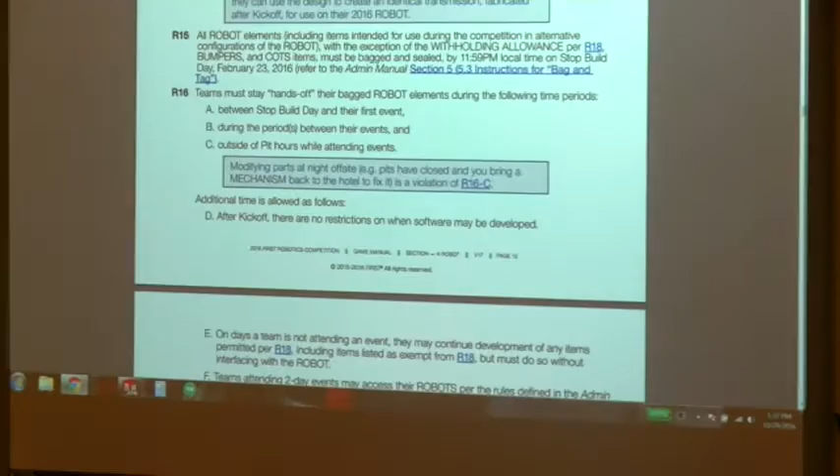So we got real lucky. We were real fortunate, everything fell in place for us at the right time. And to be honest with you, the robot wasn't even nearly as complete after the 6 weeks as you see it there. It wasn't even close.

We had several different regionals that we went to, and at every regional we were able to work on the robot and make it better and better. At Palmetto, our goal, we sat down as a team and said, okay, in 6 weeks what is it that we can do? And then how many regionals are we going to? We ended up going to 3. And then what do we do at each regional to get ready for the finals at the nationals?

We knew that in order to compete in the first regional, we just needed to drive. We needed to figure out how to make that thing drive. So we went to Palmetto and we took 3rd place. We were working on the shooter, didn't quite have it figured out yet, but we were driving over the obstacles and we were able to compete, and we did okay.

We took 3rd. Went to the Buckeye, that was the next regional, and our goal was to get the shooter to work. So we finally got the shooter to work, so we were driving and the shooter was working. Then the next regional after that was Cincinnati, and our goal there was to climb. So we went from driving to shooting to climbing.

We got the climber to work in the pit, and we finally had a chance in one of our last matches to try to climb, and it didn't work. We almost had it. So then we're thinking, okay, by the time we go to the Nationals, which is in a few weeks, we better have that climber working.

So we got to the Nationals, and we were told our robot's illegal. The wheels went past the frame, so we had to extend our bumpers and our frame by 1 inch. So we spent all our time working on our robot, extending the bumpers, extending the frame, so that we would cover those wheels, instead of working on our hanging, climbing mechanism.

It used to be 20 pounds, now it's 30 pounds, and who knows what it will be next year. But these are the most important rules, and I highly stress and emphasize the importance of reading the rules from cover to cover. You're going to see a lot of stuff that's repetitious from previous years, because think about it - these guys putting on a tournament, they've got this huge manual, they're going to change a few pages, a few things. And sometimes they hide important rules in the appendix. So you've got to read it from cover to cover, you've got to read everything.

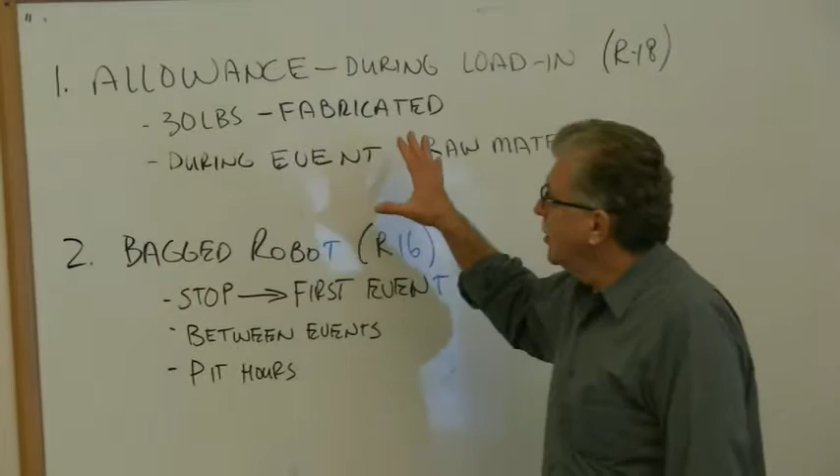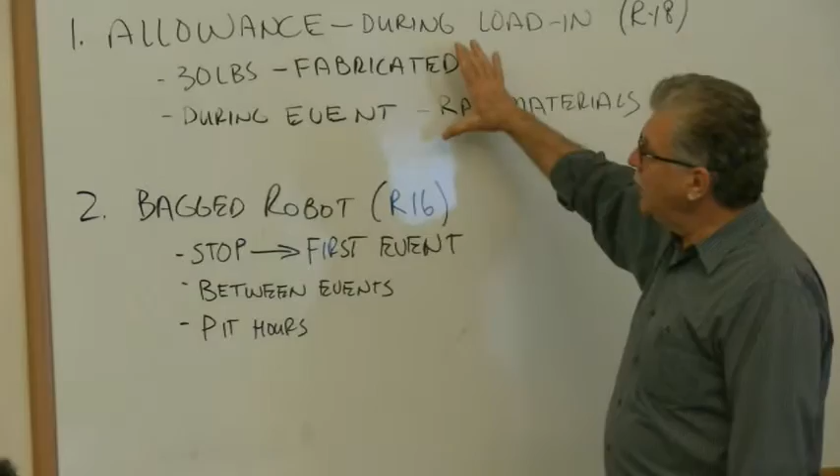And when we read the rules, this is what we based our extended build season on. Number one, you had an allowance during the load-in, rule number 18. You can bring up to 30 pounds of fabricated material. During the event, you can use all the raw material you want. So what that told us is that after the 6-week build period, we bag up the robot, but we can work on 30 pounds of something. So what is it that we're going to work on? You have to actually schedule it.

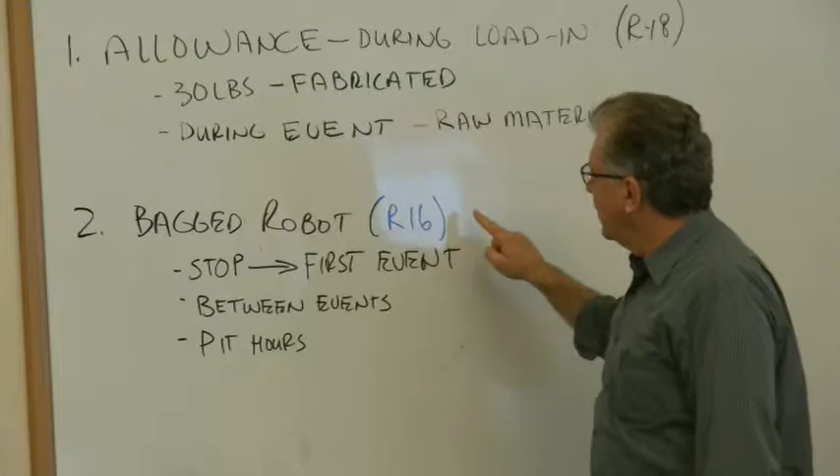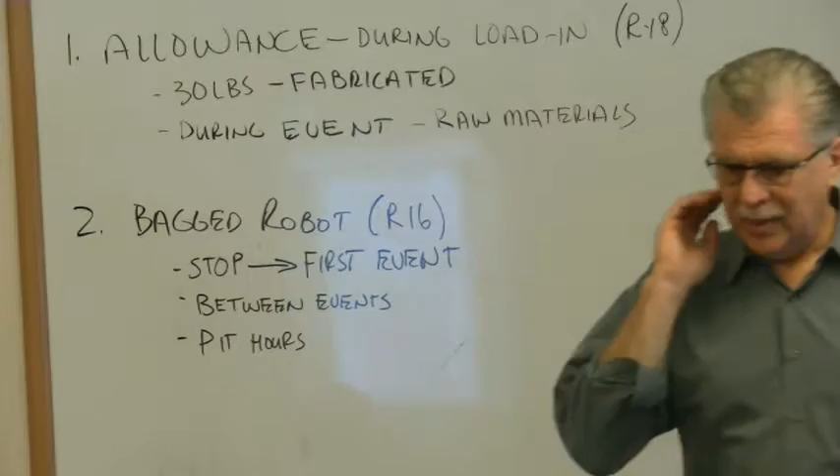The other part is that the robot has to be bagged, rule number R16. You have to stop working on the robot up until the first event. You cannot work on it between events. And you can only work on it during pit hours, not after pit hours. So you can take all that raw material. If you have an object that you want to build, you have to design it so you can build it with your tools in the pit, whatever you have in your pit. And you can build whatever you want. You can build a whole new robot if you wanted to, if you have enough raw material. Or you can bring in 30 pounds of replacement parts that you can put on that robot.

And this is what we took advantage of. So Robert's going to show you the actual setup - any questions before I go further? Because this is a real important rule, because this is what extended our build season. Because at every regional, we brought something in. Yes? Would you bring something different in every regional, or would it be the same 30 pounds there? You can bring something different in every regional.

Here's something else, and this is something we were kind of discussing. If you have your robot that weighs 120 pounds, they don't weigh it when it leaves, and they don't weigh it when you first bring it in. So could you have a whole bunch of stuff in that bag, like maybe another arm you're working on or something wrapped up? You have to stop working on it, and you can't get to it again until the next regional, and you can bring another 30-pound additional into the competition.

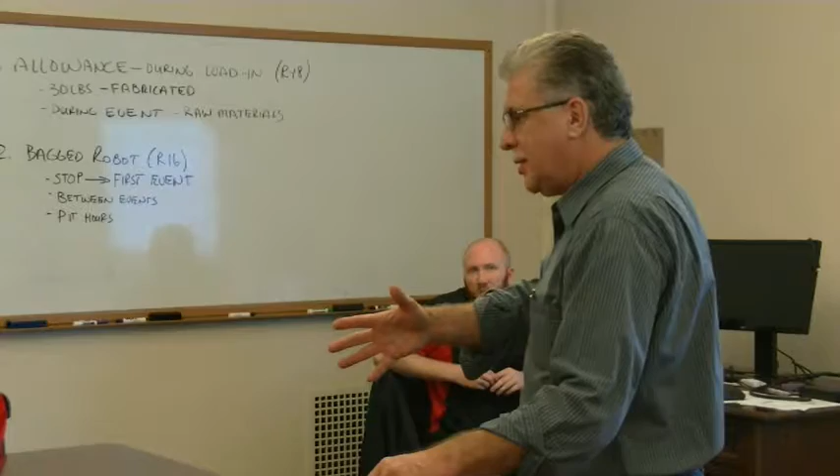Yeah, exactly. Now you're extending your whole build season, aren't you? And according to the rules, that's legal.

And people do that. If you looked at the Buckeye Regional, you remember that one team, I think they were called the Sparks? They didn't compete in any of the matches at the beginning. They weren't on the practice field. I think they missed the first 2 matches they were in, and they finally started coming out, and they ended up winning the competition. Why? They were working on the robot the whole time. They were actually building the robot. It just came in pieces and parts in the bag. And they had some 30 pounds worth of other equipment that they were assembling - that whole robot in the pit. That was their first regional. So they really extended their build season, right?

So they didn't even have a completed robot when they bagged it. And they finally completed it after their first regional. We saw them at the Nationals. And they finally had their robot working.

So if you think about what it is that we did this past year, we're not going to be able to duplicate it this year. We're not going to go to as many regionals. But at every regional we went to, technically, we can bring in 30 additional pounds of material to put on that robot that's fabricated, to either be a replacement piece. So as we're competing, we see there's something wrong that doesn't work, let's fix it.

So you can fix it during the pit hours. You can strip everything out. And at the Buckeye, we stripped a lot of our stuff off that robot. But it was when we weighed it before we left, so it was less than 30 pounds, so we knew what we could bring back.

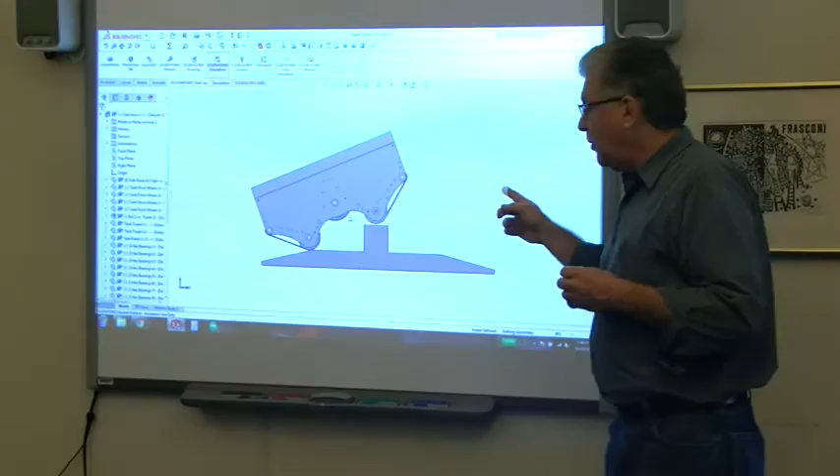So if you look at the design, Robert's going to go through the stages of designing. The first thing we designed was how do you drive over the obstacles. And before I get him started on this, here's the reason why we picked this design.

If you remember, our robot had two series of tracks. We wanted to do pneumatic wheels, but nobody had pneumatic wheels left, we couldn't buy them anymore. Do you remember that? We were calling everywhere. The ones we found weighed so much, and we'd have to modify them so much, we said man, we're messed up, everybody bought the pneumatic wheels. AndyMark didn't have them, McMaster-Carr, we couldn't find the right wheels. We called everywhere to get these pneumatic wheels, we couldn't get them. The 4-inch, that was the 4-inch pneumatic. Every team in the country had those wheels, they bought them all up. There wasn't a single pneumatic wheel we could buy.

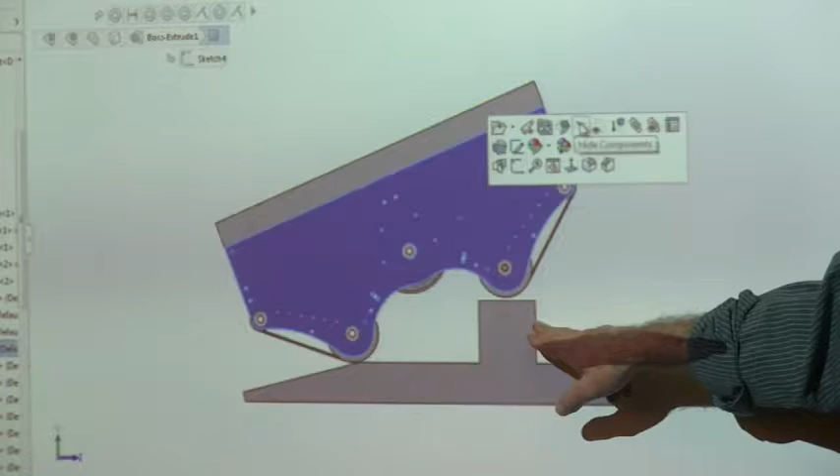We said okay, step 2, what do we do? We know we have 4-inch obstacles we have to climb over, right? So if you have to climb over a 4-inch obstacle, how do you make sure that robot climbs over it? So we decided we were going to do a tank drive system, okay?

So this really is a tank, kind of. Let me explain something here. When we looked at videos of a tank, you have your drive wheel, and you have all these little wheels that are loaded with springs, and they're putting pressure on that tread, and you have an idler wheel there. So your tank tread goes like this, and these have springs pushing down. So when this is driving, this pushes up, so your treads are constantly moving up and down with the wheels when you're going over obstacles.

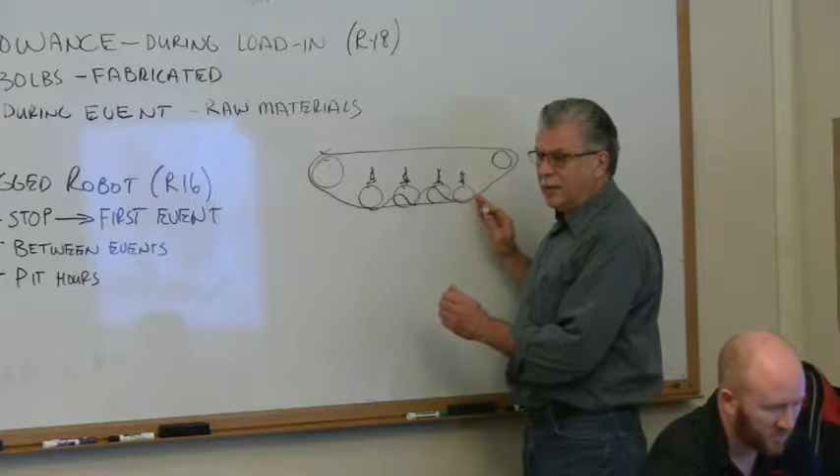So we thought, okay, if we build this, we're going to add 120 pounds to the base and not have any weight allowance left for the superstructure, because by the time you put all the springs in there, all the mechanisms to build a true tank drive system, you used up all your weight.

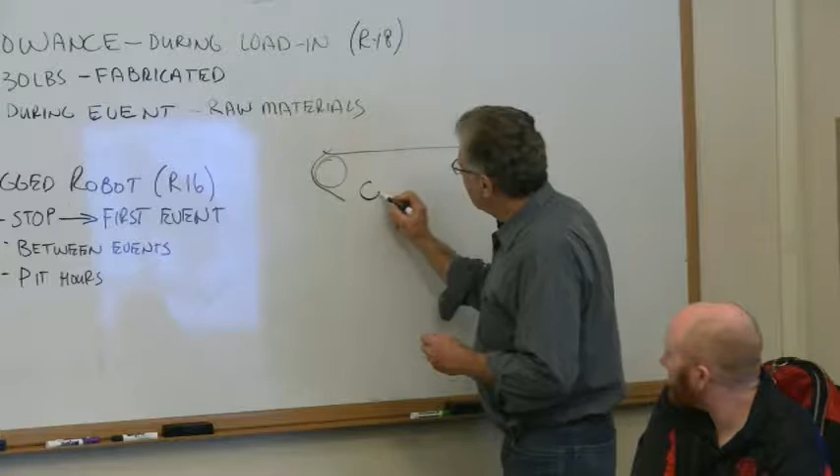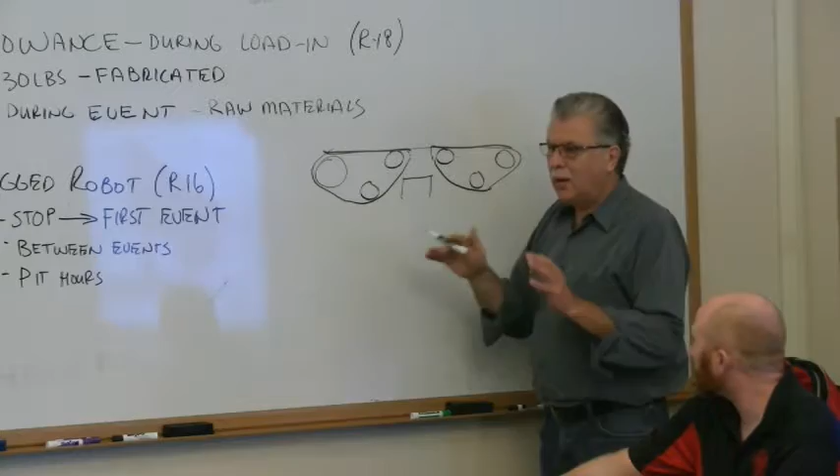So we said okay, what if we eliminate all this? What if we eliminate all that? We still have this, we know we're going to have something come up like this, there's going to be a void. We're going to have to climb over 4 inches, we're going to have to come back down again. So instead of having it spring-loaded, we had it fixed, cut all the weight out. We came up with two tread systems where that 4-inch obstacle was in constant contact with our tread at all times. Robert will show you here if you can move it.

Again, SolidWorks allows you to do this. This is our system, this is all tread, this is chain turning everything with these. This was the first version, you can see there is a wheel in the center. So we originally came up with this design, and this was week 1 that we had this all CADed up, everything was set.

We called the company that we received our belts from and said, okay, here's our dimensions, this is what we want to go with. And the guy on the phone just instantly stops and goes, oh, we have a problem. Okay, well, what's the problem? Your belts need to be 50% larger. So in those few days that we worked on coming up with this idea, that whole idea was scrapped.

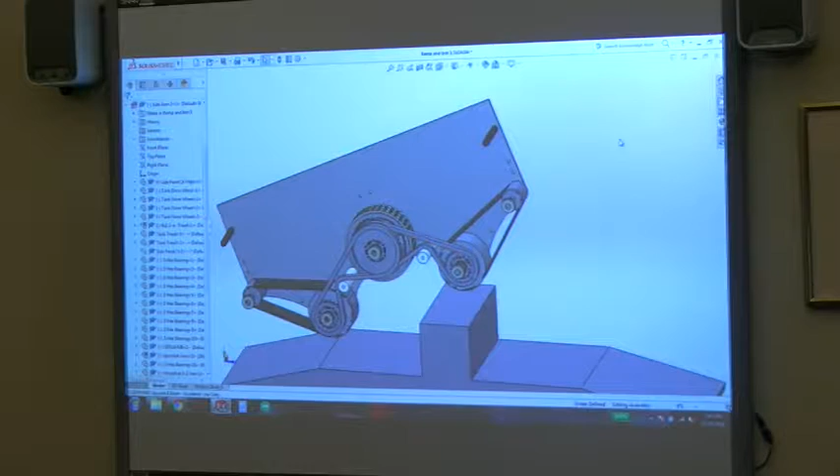And then it's like, okay, well, where do you go from there? Now the next idea is what George was saying, where we combine the two of them. Give me a second. What we actually came up with was our current robot design.

What we ended up doing is we said, okay, if our belt space needs to be 50% larger, the only way to accommodate it is either to have a giant coil or a giant lead coming off of it, or the next thing is to incorporate one full-length belt. The problem with doing one full-length belt is, like George was saying, how we want as many points of contact when we go over that.

Now what you're going to do is you're going to have a roller that's basically on top of your tread. And you don't want to have that because now you're wearing the surface of your tread a lot faster than you would off the regular carpet. Not only that, the robot would be very stiff, right? It would be bouncing quite a bit when it's going over the obstacles.

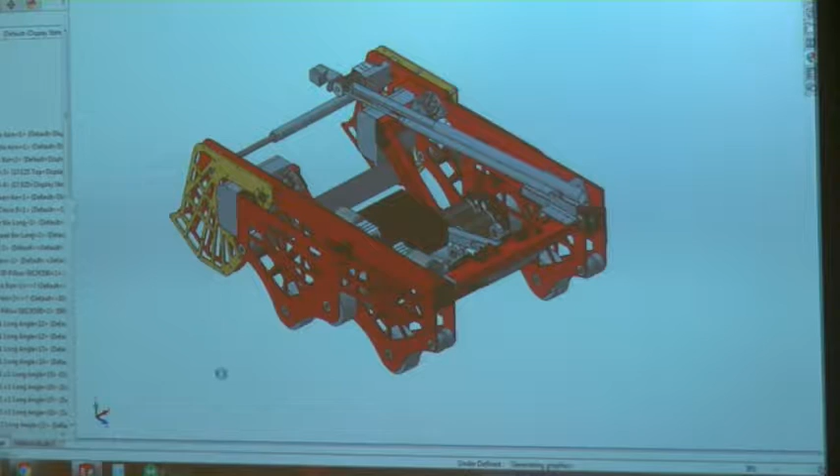And the weight of the traction system, by putting springs in there and having rollers pushing down on that track to make sure there's contact, you're adding a whole lot of weight to the base of the robot. And again, you're trying to make a real light base so that you can put more weight into your superstructure.

Keep in mind, right now all we're talking about—he's showing you the whole robot—but the first couple of weeks when we're planning, all we're talking about is just driving over those obstacles, okay? That's all we're talking about. That was our number one goal.

And so we're trying to figure out how to drive over those obstacles, and nobody's giving us any tires. We have no tires, we can't get tires. We got to come up with something.

So we knew we wanted to shoot, and while we're trying to figure out how to drive over the obstacles, these guys are in the corner. What'd you try? You tried pneumatics, which we eventually used, but you also tried—why don't you tell us?

There were like three or four different ways of shooting the ball. We had spring. You had spring. Yeah, spring. We tried motor driving the old flywheel, but that was probably the most effective one. Did we do surgical tubing? That was our first one, right? Yeah, surgical tubing, you tried that. So these guys are experimenting, and you knew what the space limitations were, right?

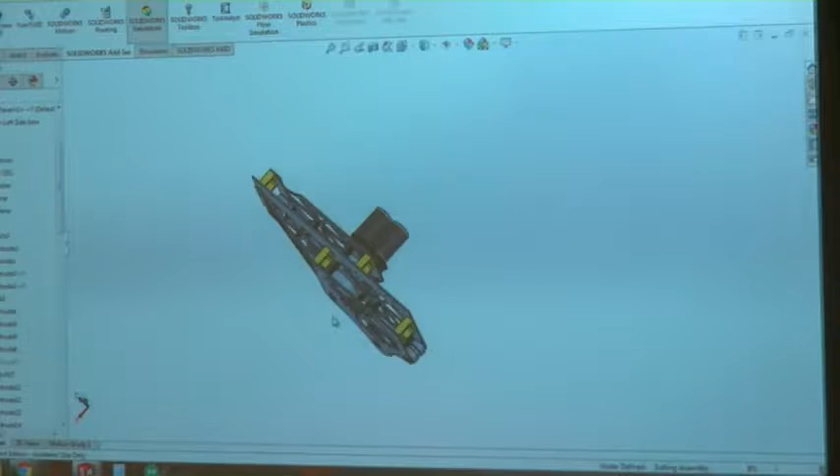Because we knew that we were going to have this drive system, we're going to have two of these, we knew how much room we had in the middle, okay? And so we said, okay, here's your space, come up with the shooter. So they're trying to figure out what the shooter is while we're doing the drive wheels.

Again, you only have six weeks, right? You're not going to get this whole thing complete. And the other thing is we said, okay, we also want to climb—where are we going to put that? Well, if you notice, when we were designing this...

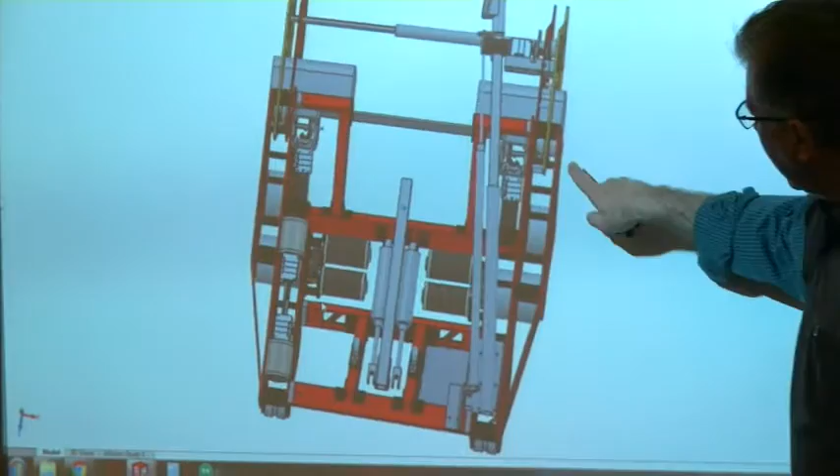And then once they got the shooter figured out, they started working on a pickup mechanism. We must have gone through 10 different things, okay? We did a tape measure, and we had a tape measure system cad'ed out. We had three different ones actually. We had the tape measure one where we had a roller extending a tape measure to bring the hook up.

And then we had another one that was linear slides built out of aluminum flat stock pieces that slid on top of each other. But they were all really heavy, and they all took a lot more space, though they all fit within that space we allocated on the robot. Okay, we eventually came up with a paint pole from Home Depot that actually lifted up the hook and was able to winch us up.

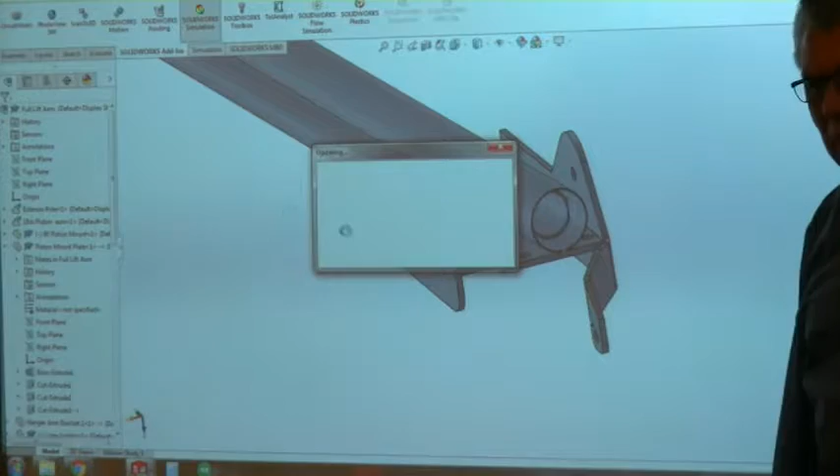Okay, so that right here's your paint pole. And again, all of this, the paint pole system, the tape measure system, all those systems we were trying, we were able to do after the robot was bagged up. We were still trying to figure it out because we didn't have it all figured out yet, so we were extending our build season.

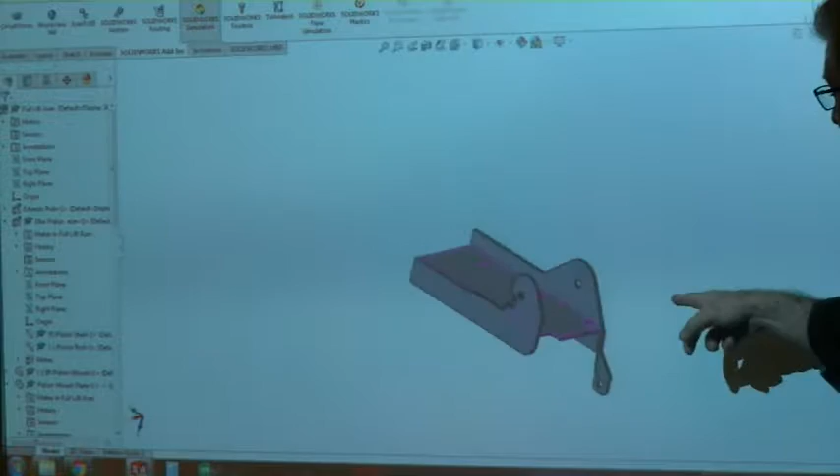This is a paint pole. It costs $18, you buy it at Home Depot. Lowe's doesn't have it, unfortunately. The only place you get it is Home Depot, so you got to make sure you got a couple of these. This is a pneumatic piston, and this we have to build. These pieces we have to actually build on the premise because we didn't know exactly how it would fit in the robot. We had a general idea based on the CAD drawings, but everything here was assembled with screws and nuts and bolts, and we cut it out with the jigsaw and bent it up with a vise to get the right angle so it would fit inside the robot. We kind of knew where it would fit, but we weren't positive, and so we had to build it all.

I think we did this in Cincinnati last year, putting this piece on. We didn't get the piston until the Nationals. We had the special order piston, right? Yes, so we bought that in for the Nationals. 18-inch stroke. Yeah, so we had to wait for the Nationals for that.

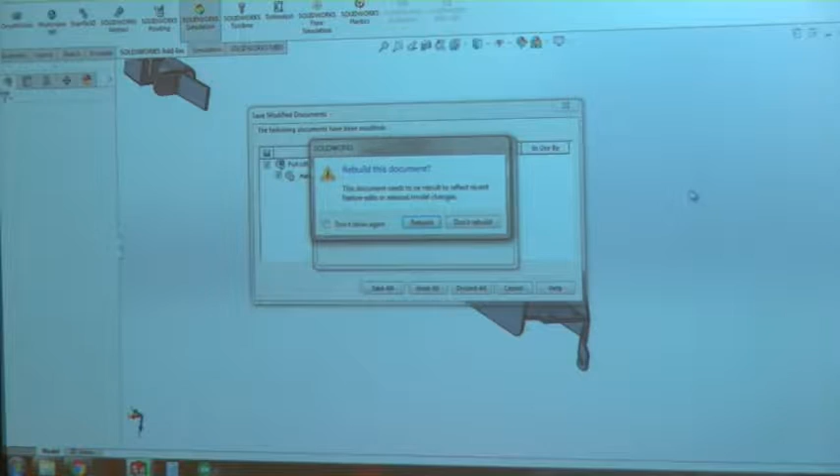So I guess the point is, of all of this, and Robert will go through the different stages of what we went through and how we built it, the point is, if you have a good CAD model on the front end, and you have a plan of extending your build season where you know you're going to do step 1, then step 2, then step 3, you can schedule it so that you're building the other accessory pieces within the rules to put on your robot, and make sure you're prepared in the pit to do whatever work's required to get that done. So you can actually extend your 6 weeks. But it's important to go to more than one regional, that's the other catch.

Any questions so far?

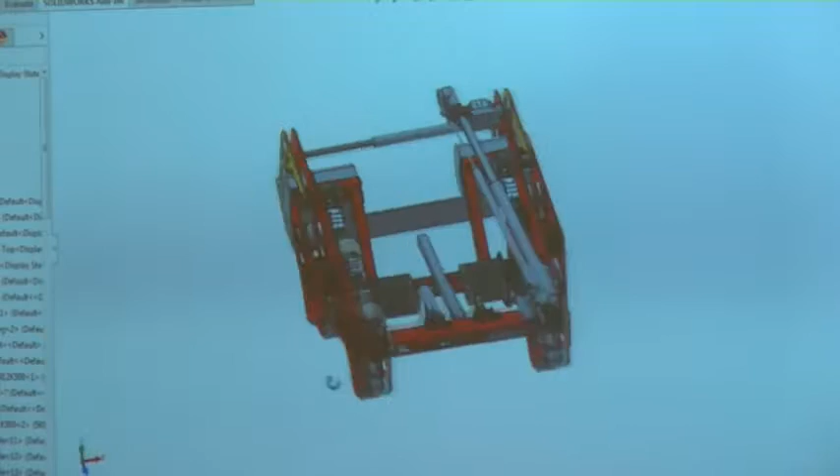All right Rob, why don't you walk us through this? What do we do? So, as George said, the first design for this - we've been doing it for so many years that we have a lot of parts laying around. So usually what we'll do is we'll go through all our stuff and find pieces, and the kids might come up with an idea and we'll send them upstairs to grab parts for it. We came up with an idea using old window motors.

The window motor is worm gear driven, real small and compact, fit into a real tight area. So what we originally did is in this area right here, we would cram a motor in. Our intake arms were inside a little bit closer, which just kind of protected them more. There was less of a chance of somebody hitting them.

2 or 3 practice matches in, we realized that a lot of the internal workings were made out of plastic. There were a few things we might have been able to do, like add limit switches, so that the entire arm, when it's slammed down, would be a little bit protected. But just having the internal parts being plastic kind of threw that one out.

We went through 3 motors in Palmetto - three sets of motors. There's a right-hand version and a left-hand version. We just constantly kept cracking them, kept trying to repair them. That didn't work. So that was Thursday morning.

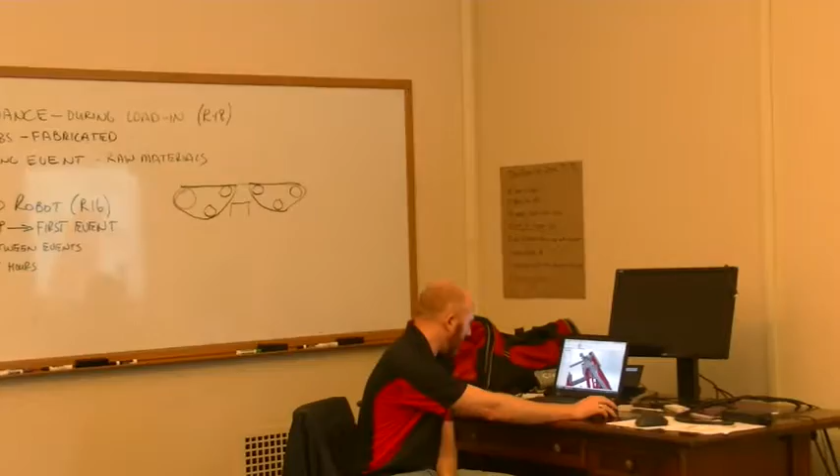We got on AndyMark, got on Vex Pro, looking for different motors - see what he's talking about is this motor right here. We had this arm on the inside, and the motor was mounted here, and the arm was on the inside of the motor. That was a plastic housing, plastic. It had a lot of torque, and that's what we needed - we wanted to lift things. But the gears inside, if this arm took any sort of impact, any kind of hit, the motor would break.

We should have known. Yeah, it was terrible, we did not count on that. So was that because of the plastic housing, or was that just something else?

Yeah, everything inside, the gears would strip, the housing would break. It was just terrible. We got clipped by some other robots, and by the field too, just driving around. When they hit like that, they just force crack it off. So this is our very first competition in Palmetto.

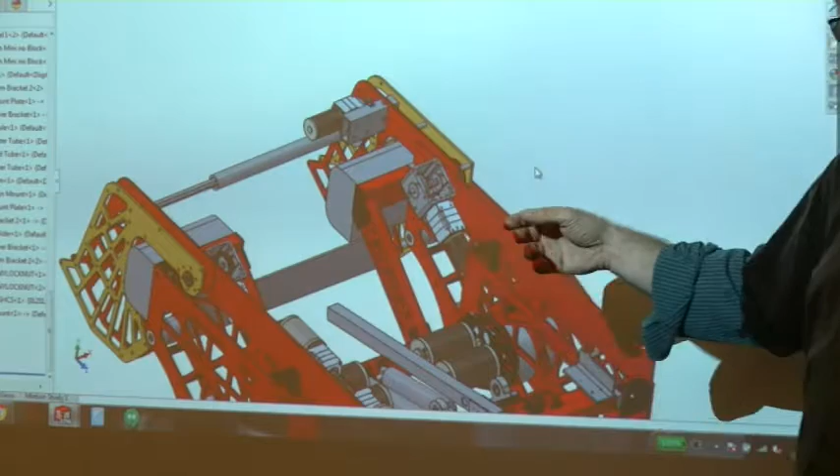It's like, what do we do, throw in a towel? We're done. Our whole system here for picking up the balls isn't going to work if we use those motors. So then, like Robert said, they started going through catalogs at the competition. What do we do? What do we put in place? What kind of gearbox do we put in there? How do we change this?

And again, because you had the Solidworks models, we were able to download the gearbox, put it in, make the changes, figure out what you're going to do, extend the arms out, what new materials do we need, what do we take off the robot, what do we take back with us, let's stay within that 30 pounds, let's make sure we weigh it before we leave.

And so we're trying to figure this out because in 2 or 3 weeks I think we had the Buckeye, right? And so we had to be ready for that. We weren't going to come to Cleveland, be embarrassed, or couldn't even lift balls up. It was terrible, we were getting beat up pretty bad with that.

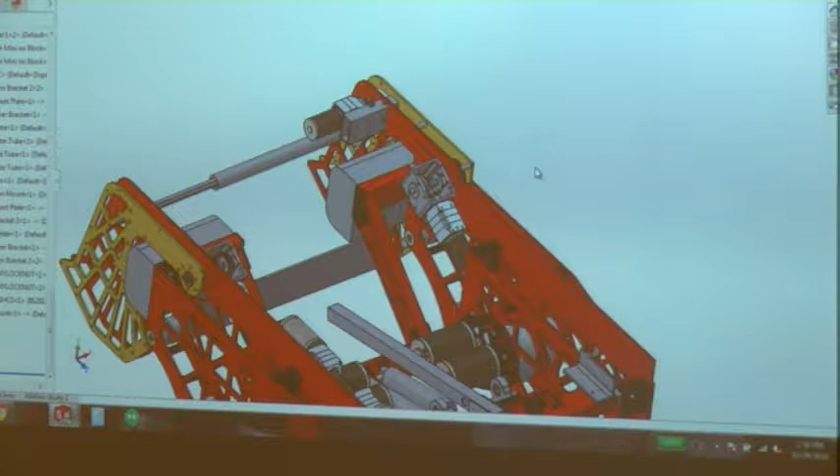So like I said, we sat down, and within maybe an hour of sourcing out new parts, seeing what was available, finding the parts, bringing them in, redesigning the arms, I think I sat down with a couple of kids, and we came up with a new model.

And it was simple enough that just a few extra days, and even going through testing with the robot, you kind of would have found out. But as we all know, practicing at home and running a full competition are two different things. Things happen that you don't really think of. Who would have ever thought to kick the side of the arm and see whether or not the plastic housing still holds up?

But from going there, we were able to come in, like I said, we added in these motors, there's 2 on each side. We didn't count on this happening, but what we actually did is the opening for the balls to come in, we actually opened that up 6 or 7 inches, something like that, which you never really think of, because if you're practicing, you kind of just see a ball and drive towards it. You don't count on being 40, 50 feet away on the other side of the field and noticing how hard it is to pick those balls up.

So once we came up with that, we went through and were able to change everything. We actually modeled this on the bus ride home Sunday. We took time just passing the computer around. Somebody would throw in one part. We would pull everything together, get everything completely designed up.

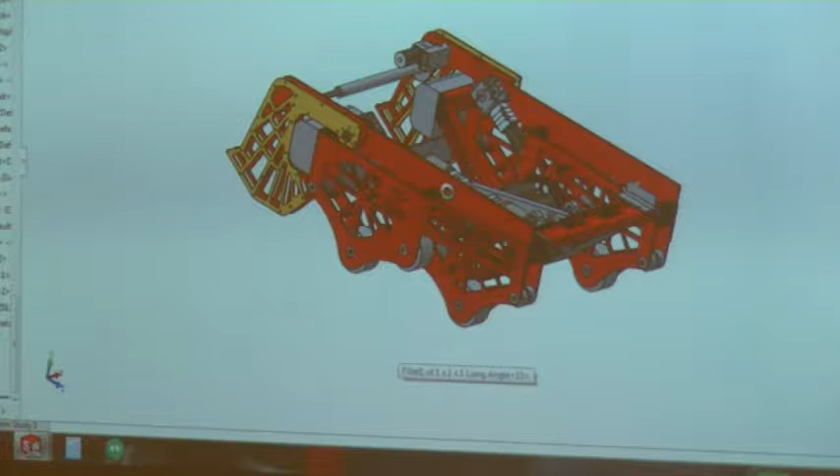The other thing we kind of do is, I can show you how. What we usually try to do to make stuff simple is we'll design our parts similar. When we designed our frame, if we have 50 pieces, we don't want to have 50 different pieces. We'll try to make them as close as possible, or if not the same. If we go through and look at our frame...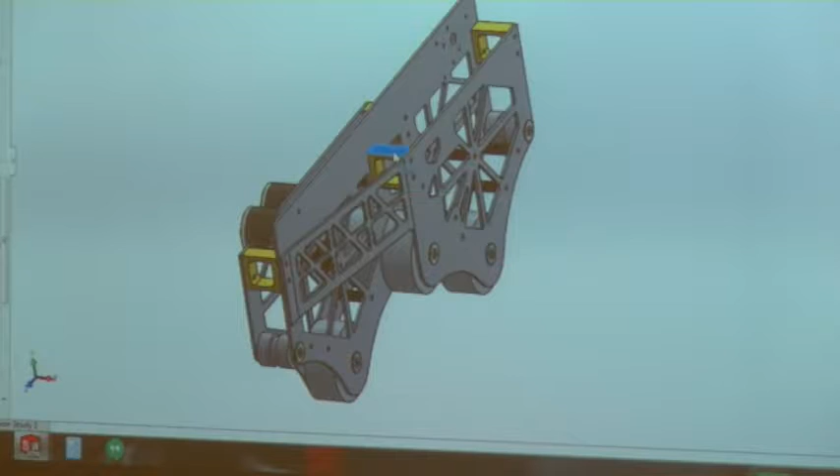What we actually see is this side is almost exactly symmetrical to the other side, where all of the plates mount, all the blocks. Whenever we design blocks, we try to make them all the same. Like I said, just in this side alone, this yellow block, we have 4 of those. With those 4, we're spacing out the panel, making sure everything stays real tight, real strong. So we designed all of those up similar, if not the same.

Anything that you can buy off the shelf obviously takes time away from somebody having to make it. So we spend hours and hours on McMaster Carr. The nice thing about McMaster Carr is almost any part that they have on their website, they have CAD models for.

Bearings, everything else - it makes stuff real life as far as knowing where things go and how to place them. A lot of times what we'll do is incorporate all the screws, nuts, and washers, so that when you put this whole assembly together, you know what you have and what goes where.

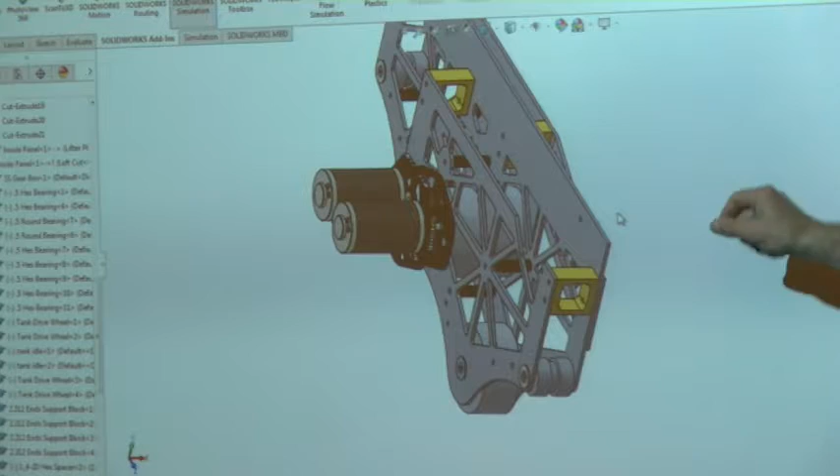Every one of these bearings is the same. All the screws we use are the same. All the nuts are the same size. They might have different lengths because it's a little bit thicker here, but we keep everything simple. You're going to go with 1/4-20 screws - you can go with 1 inch, 2 inch, or whatever, or you just keep it all the same. It might be a little bit longer, but the nuts are the same. Everything's the same. Try to keep it real simple.

And again, you can do that if you have the models built ahead of time - you can make sure that everything's lined up.

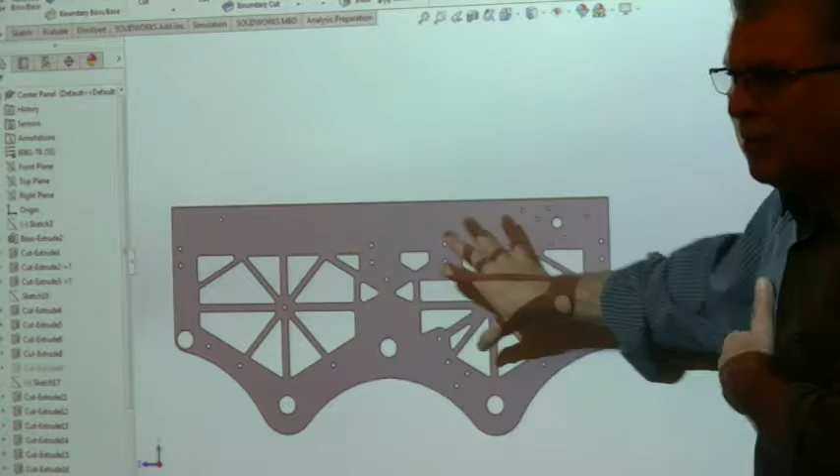What he means by keeping the parts the same: the left side is just like the right side, the front part of the robot's the same as the back part. There might be an extension piece on one, but otherwise it's exactly the same as the other piece. So when you're CADing this up, you just take this, delete this part here, and put something else on it. But you keep everything lined up symmetrical, simple, and the same. You don't try to complicate it.

And it's easy to get into this and start complicating it. Right, guys? Yeah. Guilty. Yeah. You start overthinking - don't, just keep it all the same.

This plate is the same as this plate, is the same as this plate, is the same as the other plate on the other side, on that back section. And it's the same with these plates - they're all the same. Everything's lined up.

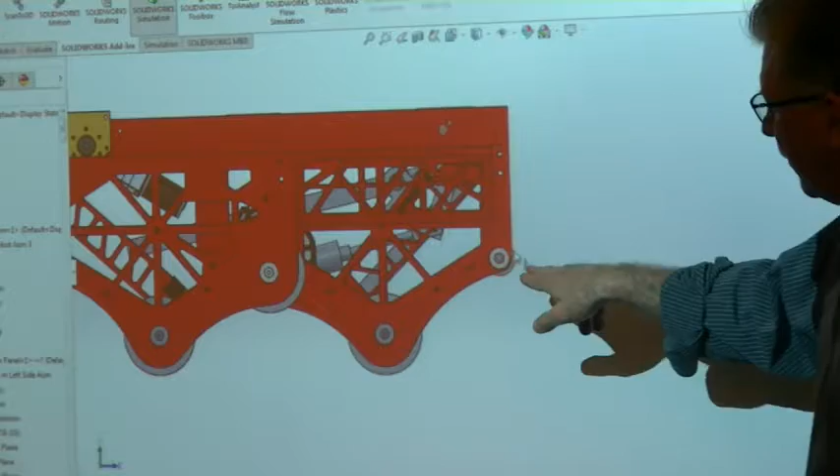Now, one thing to think of - if you make a mistake, like having this wheel stick up past the frame, when you go to the nationals the judges catch you - right here, right there, it sticks up past the frame. So you're at the competition trying to figure out how to cut the bumper to extend it an inch, how to extend your robot an inch, so it's within the robot frame. That was a mistake, but we had 4 of them, one on each side.

That's the problem with keeping everything the same - if you make a mistake, it's a big one.

Another thing I can say is I've been working with SolidWorks ever since I was a student, so since 2004. And you constantly learn, and you're constantly evolving with how you work with SolidWorks.

One thing we've been trying to push a lot for within the past few years is - we're so used to being hands-on, we'll go out there, throw something together, start drilling holes, start matching things up. But what you realize is you basically hurt yourself down the line. If we wouldn't have this full robot in CAD in SolidWorks, it would have taken us a lot longer to solve our problems.

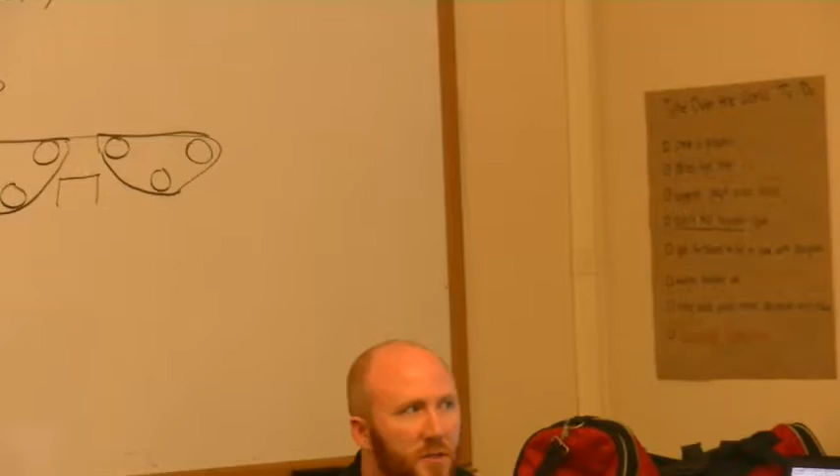If you just have somebody who randomly goes over and drills a hole point over here, unless you're taking notes and understand where you're putting everything, who's to say where that hole is? Unless you've got a photographic memory, or you can remember it that well 3-4 weeks down the road - oh yeah, it's 5 inches from here and 2 inches down - it's kind of hard to do that with everything else that goes on.

This is our second year completely designing the robot in SolidWorks, and it allows you to work through a lot of problems.

Now there are some things - the way certain mechanisms work, the way it's going to react in real life compared to in SolidWorks. I can design it to roll up at a certain angle, but you don't really take into account how fast it's going and if it's going to hit. When we looked at going over the 4-inch bump last year, we thought it'll just roll up, climb over, and nicely land. Then you get there and it's like, okay, you need to run full force and be able to launch yourself over, which is what a lot of teams did.

A lot of teams did it with pneumatic wheels, which was nice because they had that cushion, that impact. If you have a solid frame, there's no type of give in it - it makes it a little bit difficult. But you can always go back and change things.

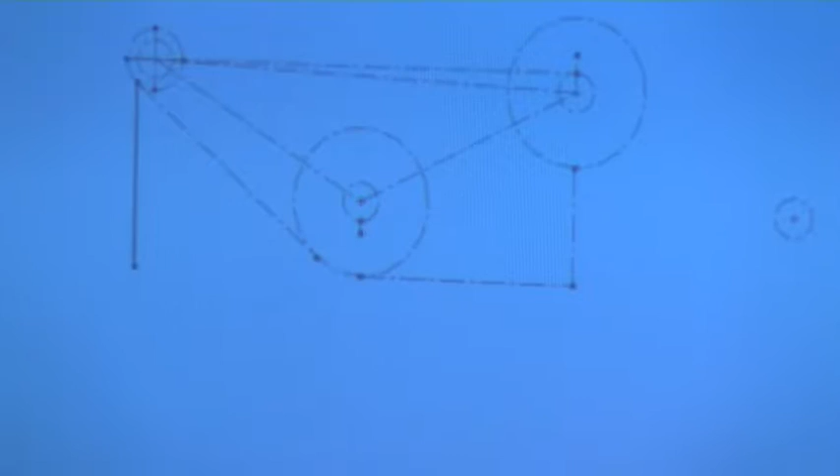I can go back to here where we first started this. What we'll do is come up with a sketch, especially with doing belts. This is our second year using belts. We've learned that belts are predictable as far as telling the company to make a certain size, but going back with tension and how hard it is to put in place, it takes a little bit of playing with.

But the main thing is now you get your points sketched up. We stuck a block in. We decided, okay, this is kind of the angle we figured we'd need. We don't really engineer a lot of stuff, we just kind of figure it out. But this gives you a way to go, kind of place things in, see how it reacts, see whether or not you like it.

You'll come up with a side plate. And then this was just a design. We said, okay, we know we're going to go over a bump, we don't want to bang up the frame all the time, so let's give it some room. We pulled some room in the way. And then we knew we had a height restriction too - we wanted to be at 14 inches.

So I think this is 12, right? I think it's 14. Was it 16 inches under the bar? Do you guys remember, 14 under the bar? So that was 12, it was 16 under the bar, but we told ourselves it was 14, so we actually designed our frame to be at 14 inches. And what was funny is George just constantly pushed 14, 14, 14. Actually I think he said 15, and that's when we said okay, we'll make it 14.

Then we ended up finally making field elements, and we looked at it and we're like, wow, this thing's like 17 inches. We constantly beat it in our heads to make it as small as we can fit, to make it work a little bit easier.

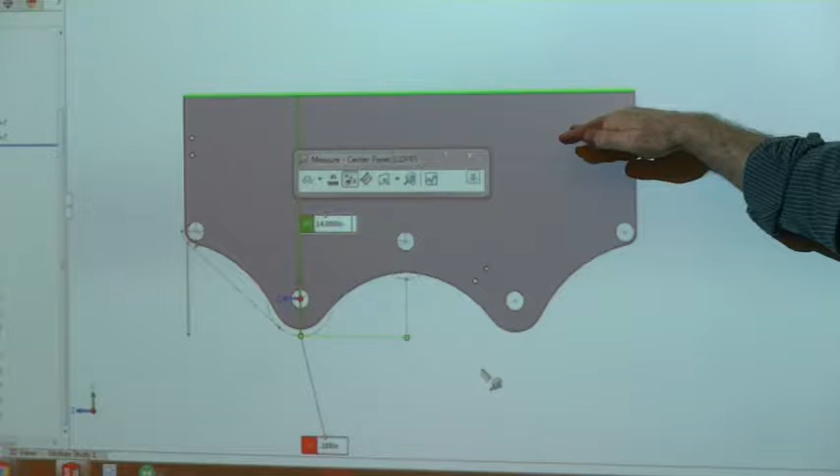One of the problems we had - we did the math on this - is that whatever it was, 16 inches of room, but you're going up an incline. So you're actually higher on the front end, and then it levels off, and it's higher on the back end. So we wanted to make sure we cleared it, so we had to figure out what that angle was. 14 happened to be the magic number for us, because of the length of the robot, the height, the way it moved, and where the wheel placement was, where it lifted - it worked.

And it barely cleared once we put our lifting mechanism on top of it. I think we got hung up once, didn't we? Going underneath there, it kept hitting it. So we were barely making it.

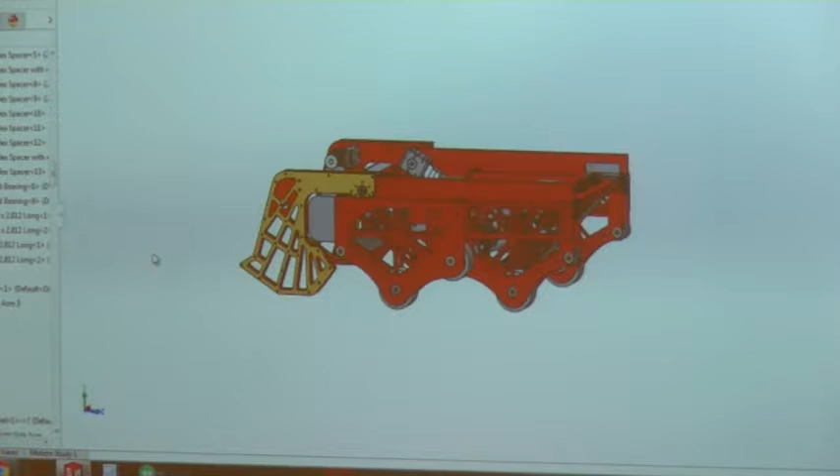Any questions while we're talking about this stuff here? You guys use CAD right now? Solidworks? Do your whole robot in Solidworks, it'll make it so much easier. Do you guys have any advice for how to make your robot in Solidworks? How you guys make it?

So it's like he was kind of pointing out - we don't even have an idea what the robot's going to look like yet. We just know what the field elements are, right? We knew we had to drive over them, so we just had angles. And then it's okay, so now we know we're going to put tread on those wheels. So all we have is the wheels and the tread. And then what do we do next? Where are we going to mount stuff?

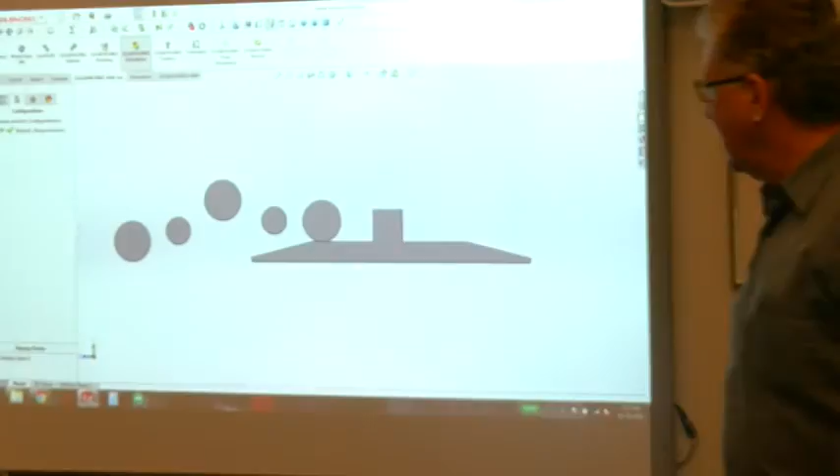And you start thinking about that - how much of a plate do you need, how much room do you need. You start talking, you have no clue what it's going to look like. We had no idea, this is what we had. Okay, we knew this is the shape that's going to be driving over the obstacle. George, that was V1 before we changed it. We did change it - this is how we started building our robot.

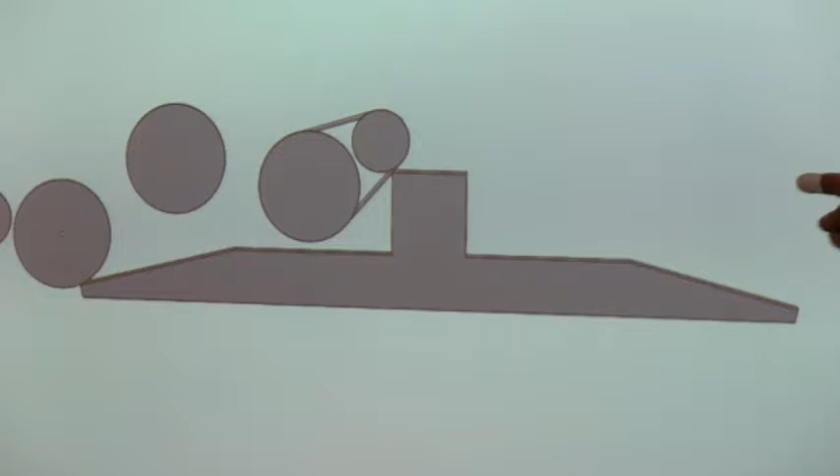Here we knew that the tallest obstacle is 4 inches tall, so we knew if we went over that, the center bar would go over anything, right? So we kind of looked at this - this had too many wheels. This is how we started, we just kept going over and over and over again. And then we put a belt on there. If the belt fits, you know what's going to happen - how high is it going to raise the robot, where's the center of gravity, is it going to flip over if we start going over, right? Those are all the things you have to look at.

So what's going to happen when this thing starts climbing? Is it going to pick it up and flip it? How high is this robot going to be? What's the angle it's going to be at? Where's the center of gravity? So you start to look at all those things. So to your point, when building the robot, what are the obstacles?

Attack the obstacles. You have no clue what the robot's going to look like. If you have time, our theme was the dragon, right? So we always try to have some sort of dragon element in our robot. We had little wings this year. That was the part that picked up the ball.

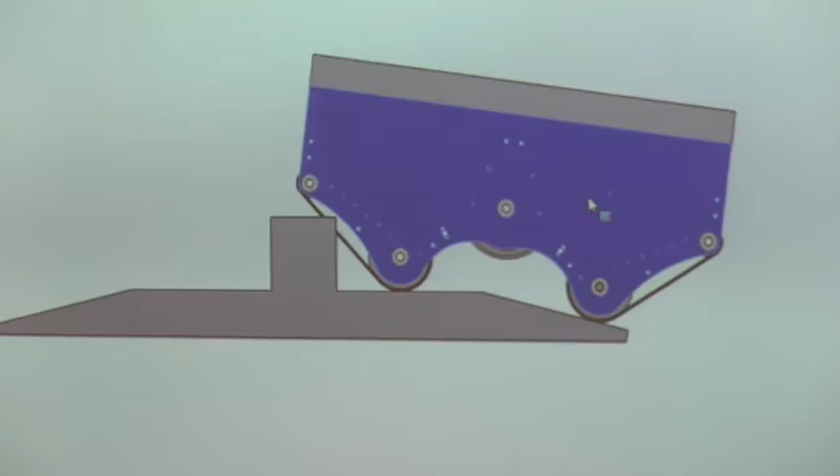And then, again, you're looking at the belts, okay? I have no clue what the robot's going to look like. Don't know what's inside here yet. I know there's going to be a motor here somewhere. But this is what we're looking at. Is this going to clear? Is it going to clear here? What happens? Are we going to get hung up here in the center on this block once this goes over? What are we going to do? How are we going to fix that problem? That's what you're looking at, okay?

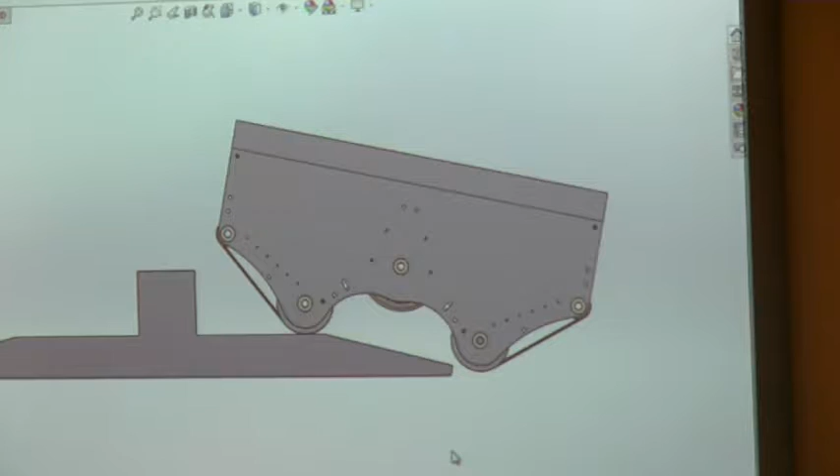I have no clue what this year's competition is going to be, but we're going to be able to drive it quickly. That's number one. And then we start looking at how you score. The shooter was a whole different problem. We knew we had space in the center. If you can show the top of the robot.

Once we got the drive system kind of figured out, and we started working on the shooter, thank goodness for these new phones with slow motion, because we could not figure out how to get our shooter to work. We knew we had pistons, we had this arm, but the piece that held the ball, that was a huge mystery. We figured out the angles that fit in there because we had CAD drawings. We were able to figure out where everything would be placed.

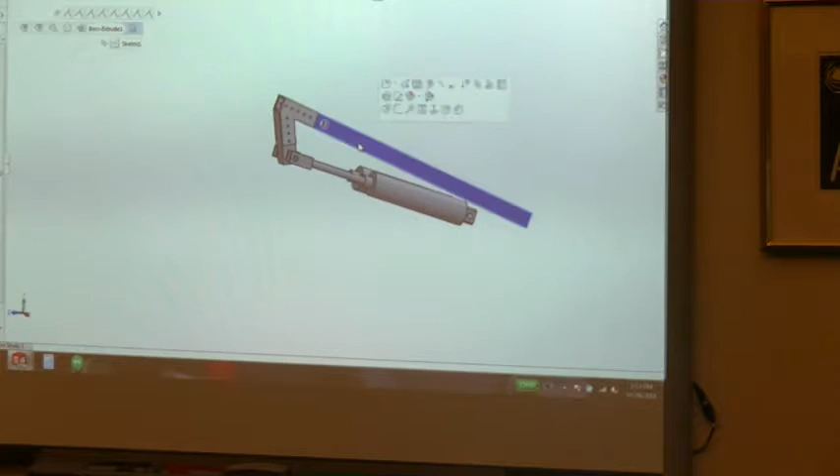One of the things we realized - we were so disappointed when we finally had the two pistons mounted in the robot, and we had this working. The piston has an intake - these are double-acting cylinders, you have an intake and output, right? So when we shot the air, it barely threw the ball. We said, that's it, I quit, man, I'm not going to do this anymore. And we realized that as air's flowing through there, pushing it, it all starts to come out. So if you eliminate the restrictions - we took the valves off the pistons, the restrictions, and let the air come out through a bigger opening - we were able to get more power through there, and it was throwing the ball.

But I don't know, do we have the gripper? Do we have that CADed up? I thought we CADed it up. You did CAD it up.

And I'll give one word of advice. Not everything can be put into Solidworks, but you almost have to pick and choose what you want to spend time on.

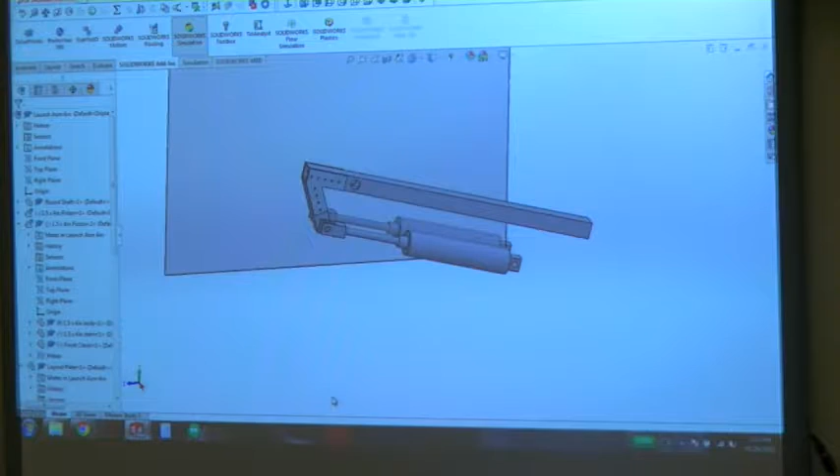The gripper that he's talking about - what we literally did, we're fortunate enough to have a brake which we can bend and form aluminum and Lexan. He went over with some of the kids through 18 different versions. We literally went over and said, okay, how do we want to scoop the balls? Kids went over and grabbed cardboard, started bending it up and said, okay, now I want to have two little fingers to grab on the back. Took a piece of something and started bending. All right, that doesn't work right. Go over here, do another one. Back and forth, back and forth, back and forth.

So I can have these guys - since I've been doing this so long, I'm usually the one they come to and say, hey, throw this in SolidWorks. And you just look at them and say, no. There's certain angles, certain things they want to do. It's almost like, my thought behind it is, we're not figuring out the dynamics of how certain things work as far as - we can't tell with Lexan it's going to bend a certain way when it's in a certain point of moving.

So you don't have time for us. We're not really keen on doing the math and engineering part, for example. I'm sure, and Rick can probably tell you, it'll probably take us a week to figure out the formulas, but we don't have a week.

It's like if you have a ball that weighs, how much did that ball weigh? 5 pounds, you have an arm that's extended, 18 inches. You had 5 pounds on the end, and you have Lexan that has a flexibility rate of whatever, and you're throwing so much force behind it, what distance you can get out of it. I'm sure there's a math formula for that, right?

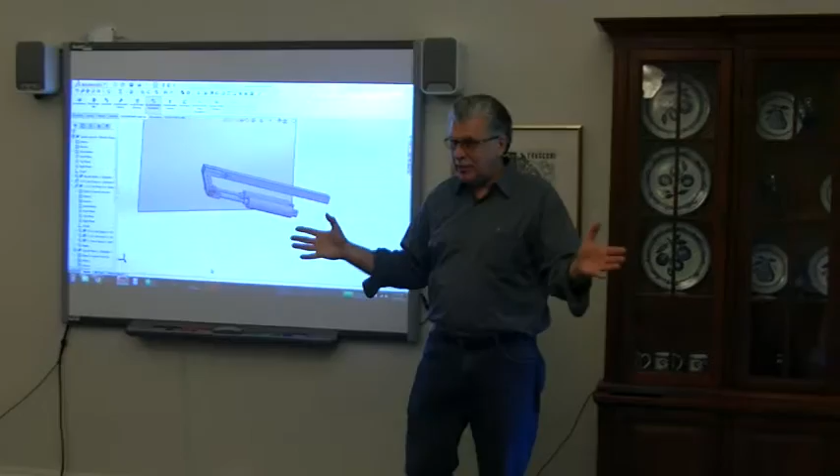Okay, so we just kept working and working simply because you only have 6 weeks to do this. You don't have 6 weeks for this. You only have a week maybe to finally perfect this. So the arm, am I right on this? The arm was so cool.

Here's your arm. Pedro Martinez, you guys remember him? I remember the interview with him and he was showing us how he throws a fastball and his fingers were so long and he grabbed that ball and he had his wrist back. He says it's all in the wrist and when you release it, those two fingers, his fingernails dug into the ball and he grabbed it, he spun it and that thing was just 100 miles an hour. And I'm thinking, great, how do we make the Pedro Martinez mechanism, right?

So we had a piece of Lexan. Actually, we did aluminum first, right? Yes. Solid aluminum, no flex at all. Could not get that momentum. It's like if you look at my wrist, this is all it did.

Then we said, okay, let's make it all out of Lexan. So now I got this going on. And it wasn't, the ball's going like this. It was like a knuckleball. Couldn't control the ball. Remember, the target was what, 10 inches? It was like a foot wide by 2 feet tall.

So in my mind, I'm thinking we got a 10-inch round. The ball was 10 inches. The target was 12. You don't have a whole lot of room to get it in there. How are you going to get it in there? It's got to be perfect. You can't allow that ball to move back and forth.

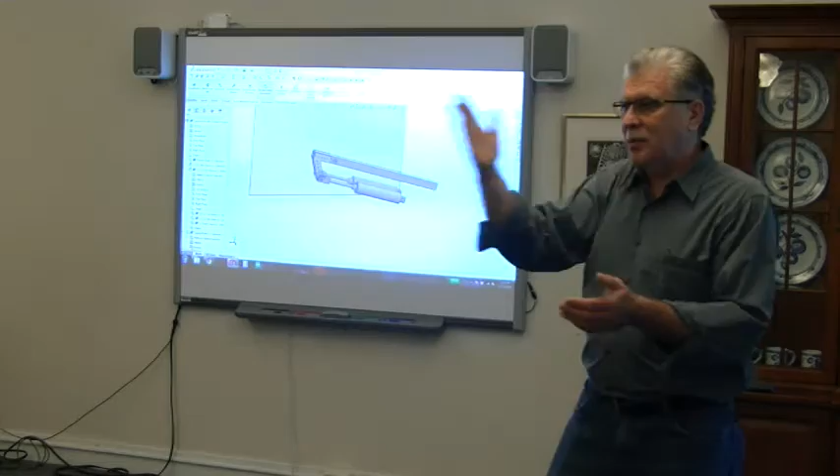And it looked like it was impossible, right? We saw other teams with the same sort of shooter that we had that could not get the ball into the target because the ball was going this way, this way, because they didn't take the time to figure out exactly what the motion was, what the flexibility was of the arm.

Now, I'm sure there's math behind it, and it'd be a great math problem, and it would take a year to figure it out. We didn't have that. Well, we did a lot of statistics on how often it was hitting. We got 10 shots, okay, we just got 8, let's try to get 9. Like that, and that really helped us by quantifying that.

Exactly. Every time we made a change, whether the fingers were longer, if they were bent in a different direction, what's more consistent? And we were keeping track of that. So it's a process of elimination. So at some point, you just have to use brute force to figure this thing out.

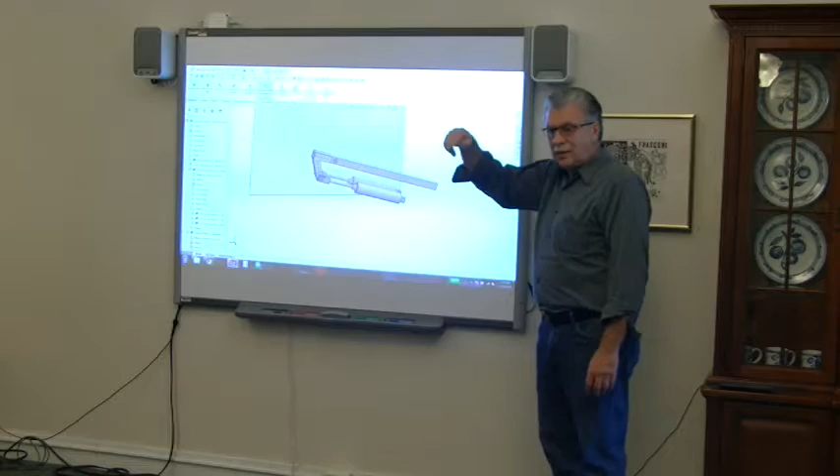And once we got that shooter done, now we were able to drive and shoot. The only thing we couldn't do was climb. Again, a lot of these pieces and parts you can bring in, or you can work on during the competition. They're not that complicated. The bulk of the robot, the big stuff, is already done. That's done within the 6 weeks.

So when you're building, scheduling your build, what do you have to get done that you can't do in the pit? Let's do that right now. And everything else that we need, let's kind of plan and figure out how we're going to do it in the pit and how we're going to do it in the different regionals. Okay, Robert.

Try not to get frustrated. Unless you've been working with SolidWorks a long time, there's still a lot of things I don't know, even after 10 years or so. But you learn as you go. For you new people starting, go online, there's tutorials, and then you almost just need to play with it.

Think of something you want to design up. Look at something that has a bunch of pieces put together and try to make those pieces, try to model it and figure out how to put them together. There's a lot of shortcuts you can find when designing a robot.

Have you all used SolidWorks before? Okay, so SolidWorks works like this: you build a part, you build multiple parts, and you put them into an assembly. An assembly is a group of parts. Within that group of parts, you can tell certain parts that they're allowed to move and certain parts that have to stay stuck together — that's called mating. Then once you have assemblies, you can start bringing them into other assemblies.

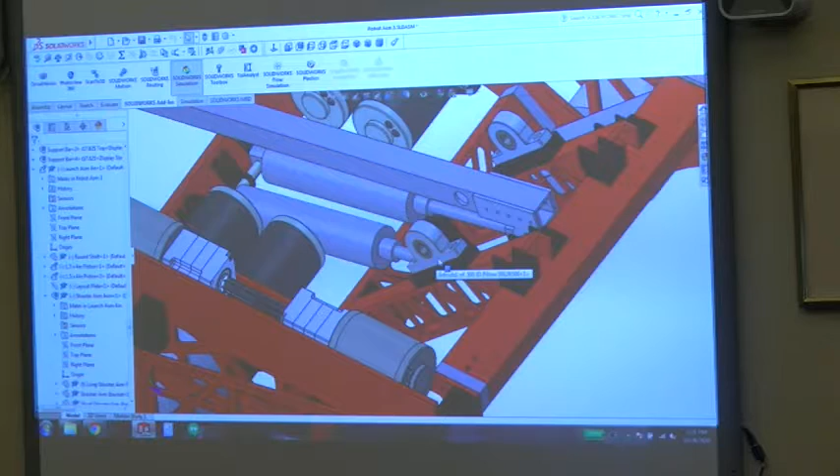These are blocks from McMaster-Carr. They're already set to a certain size — it's a manufactured part, so you can't change that size. So what you do is start changing and working things around it. A lot of these black parts are just brackets or plates.

So what you can see is we went through — you saw the drive mechanism, the sides, right? Now we're adding the shooter. We came up with the design, the angles, everything worked. How do you put it in a robot? That's what we're doing now. Again, if you have it in SolidWorks, you just start playing around with it.

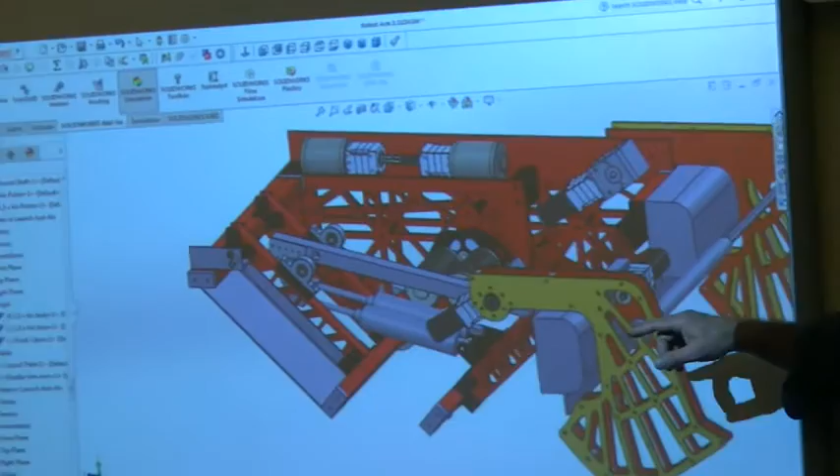Once that was done, how do you create the pickup mechanism? How do you load it so it shoots automatically? We got lucky — we had a whole different idea of how this pickup mechanism was going to work. In our minds, we were thinking we'd drive, grab the ball, pick it up, and drop it inside. Takes a lot of time, but we said we know that's going to work.

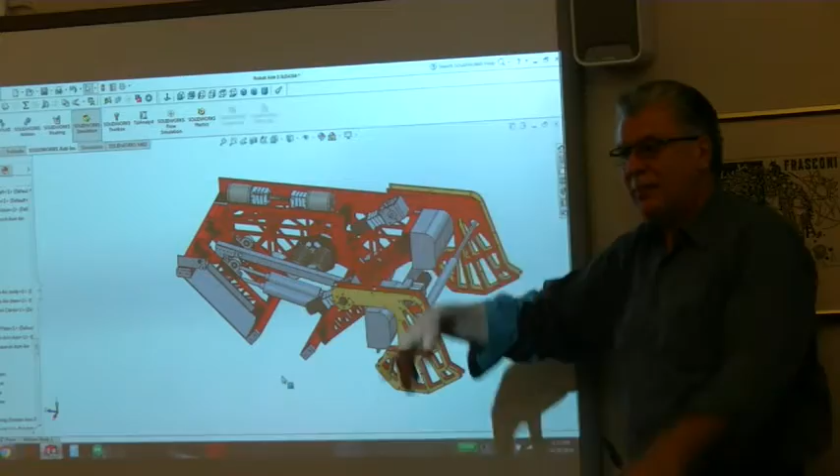So we drive, turn on the mechanism, it winds up, grabs the ball, then we lift it up over our heads, release the ball, it goes into the shooter, and the shooter shoots. But when we got done building it and started driving it around, all we did was turn this on, and it picked the ball up automatically, forced it over the bumper and into the shooter. We didn't have to lift it — we just drove it, picked them up like a vacuum cleaner. We never counted on that. It was awesome, and it was quick.

Because it takes time to pick it up, lift it, drop it, put it back down, and go after the next ball, once we put this down, we just swept the balls right in. We were able to make the cradle for the ball out of aluminum and Lexan where it caught it. We got lucky again that this was at the right angle, so when the ball hit here, it just rolled back into the cradle. We just lucked out — that opening was so tight that if we got the ball anywhere in there, it would fall into the cradle and we could shoot.

We did not count on that. No, don't count on anything at first. Just go at it — that's probably the best advice.

You're gonna have thousands and thousands of ideas. You're gonna spend time making stuff, and somebody's gonna tell you no, it doesn't work, throw it away. But what you'll find is sooner or later it'll happen.

It'll work. This is the last story I'm going to tell you guys, and then I'm opening up for discussion. I think we're here till 2:30, right? Yes. All right, so once we get the bar on there, put the bar on there for climbing.

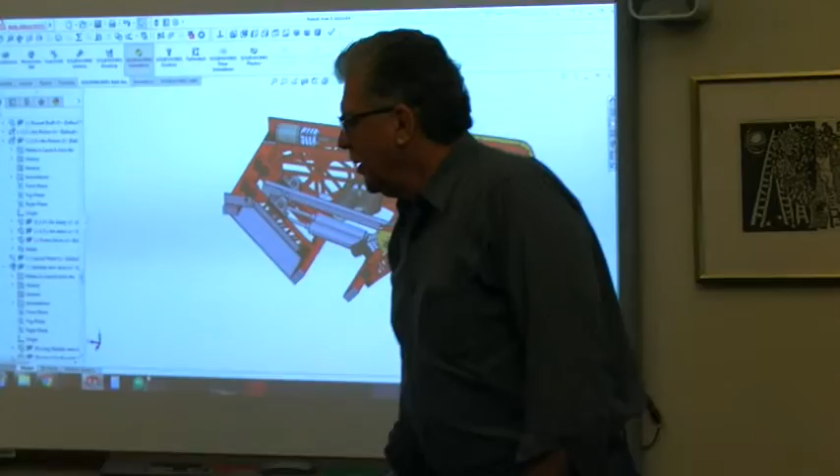The question is, how do you lift the robot out, hook onto that bar, lift the robot? And so here's your mechanism. All right, we have a hook. I don't know how many times we had to redesign this on the 3D printer to get the right angle and make sure it stays within the perimeter of the robot. But this thing goes up, the hook, and you saw the video where it hooked onto that bar, and then the rope picked it up.

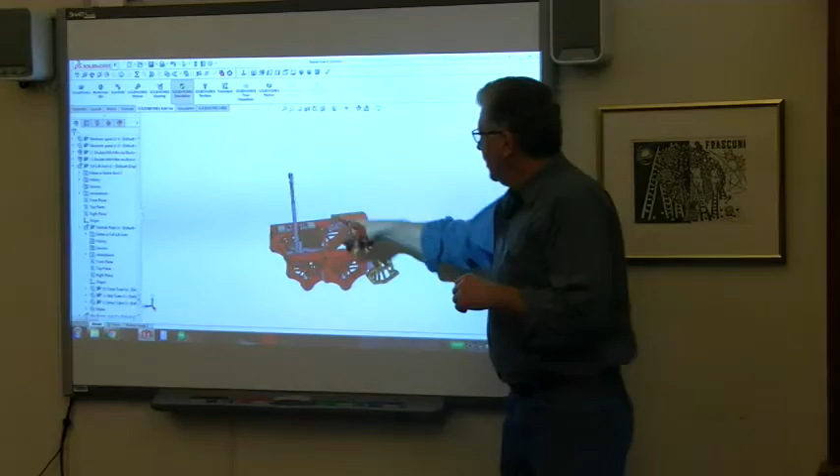Well, we had engineers come up to us and say it's not going to work. And the reason why it wouldn't work, we'll just draw it up here. If you looked at the robot, I can't show it now, but we'll show the video again, at some point during kickoff you got to look at the robot. This arm goes up and has a hook, and off that hook, this is on the front of the robot now. Here's your robot.

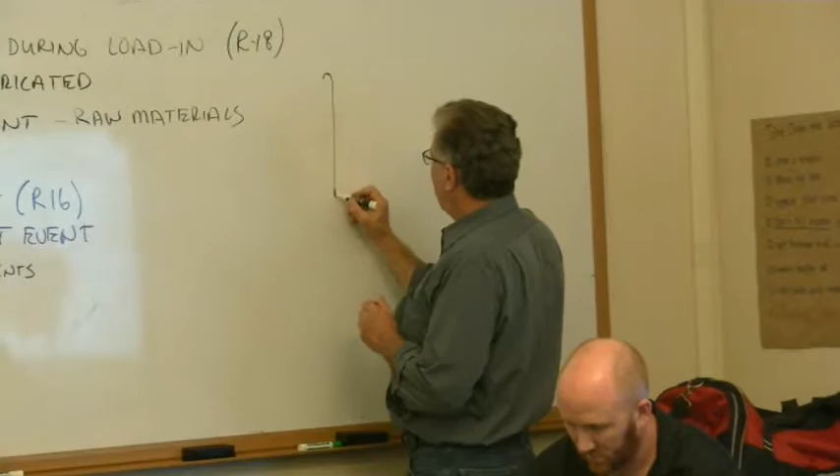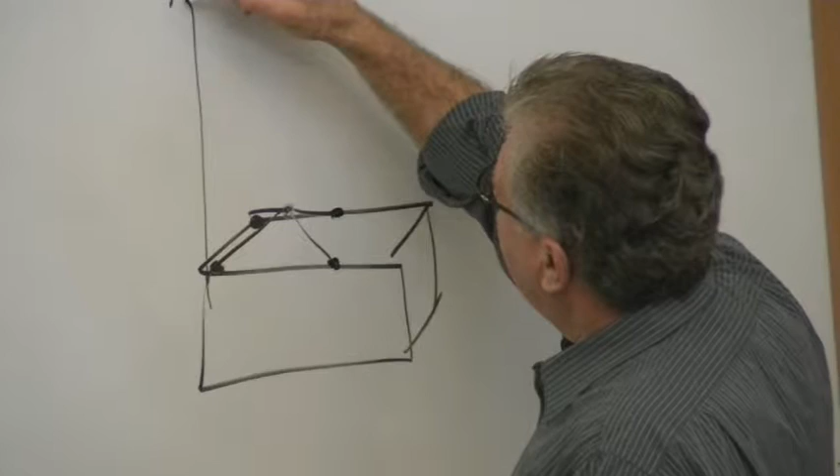It's down here. We had rope. The robot's like this. So we had rope tied to a loop here, here, here, and here. That rope came to the center. There were 4 pieces of rope that came to a center, and there was a hook here. It had rope that came from this hook, and rope that came down to a winch.

Actually, I'm going to mess this up, Rob, you're going to have to help me. I'll get the ring on there. Was there a ring? There's a ring. Here's the ring, in the center. Okay, the ring right here in the center, the rope goes here and back. Now the arm's gone. So the rope came down.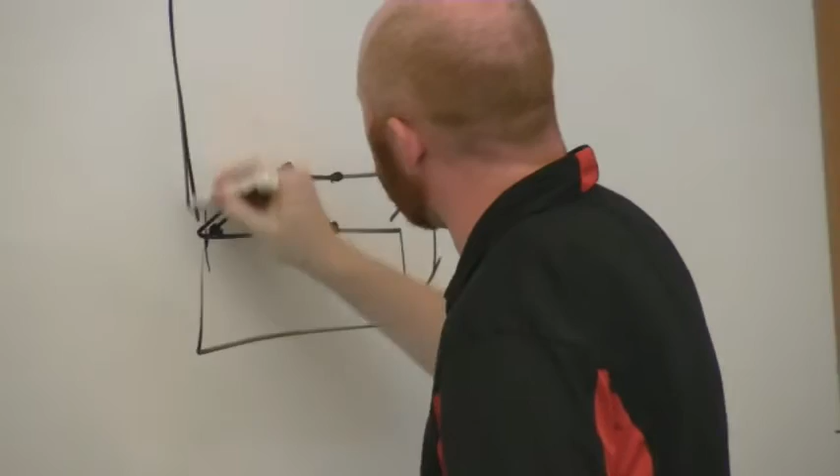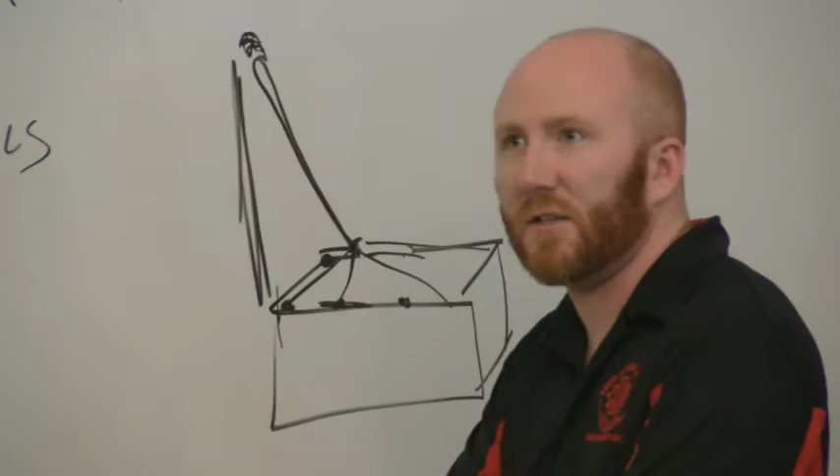There were motors. Okay, this was tied, hang on, I'm getting confused here. So now George says this is the arm. What we did is we had 4 contact points, almost all the way out to the corners. And then we had 2 motors acting as a winch. It came up to the ring, went up to the arm, to the hook, and then came back down. So all these 4 points were just set to a fixed location. Actually, not center, it was offset, but it was a location that was a fixed point. That point never changed.

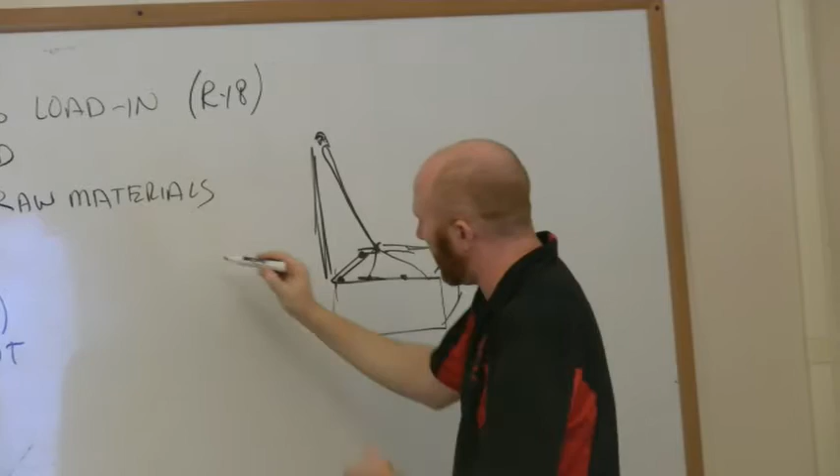The winch would draw the rope down, which fed through a center loop, came up to the hook on the arm, and then came back down. There were no moving parts, as far as bearings, between this position and the position on the hook. The hook was literally a hook with a hole in it. What we did is we actually came in and fine sanded and polished this edge, and took rope and worked it back and forth and said, okay, this rope is never going to break.

This ring right here was just a giant ring. It was completely round, used for climbing, non-slip rings. It was just a real slick, aluminum, lightweight ring.

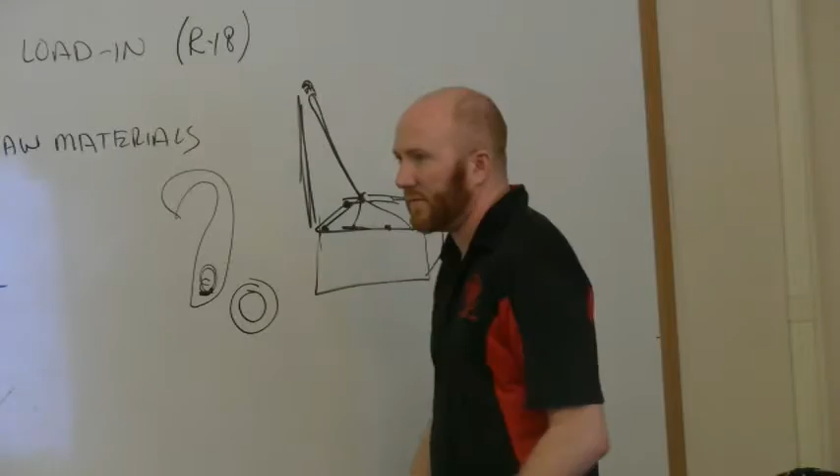So we had engineers, some from NASA, come up and say because of the angle, if we came down and over, with the motor here and the rope going straight across and straight up, the force wouldn't allow us to lift the rope up. Because that ring was up higher, for some reason that angle and the force required, they kept doing the math saying there's no way you're going to lift that rope up. It's not going to work.

And it's great that we're not engineers, we're technicians, right? We said, if one motor's not going to work, let's add another motor. So we doubled the amount of force and torque needed, and we forced ourselves up. Of course, engineers are sitting there looking at the math saying it's not going to work. Good thing we didn't look at the math. I mean, no, don't get me wrong, we just knew that if we put two motors in there... what was the ratio, 150 to 1? 100 to 1? It had so much torque it could lift me up, and that 120 pounds was not going to be a problem.

So it was amazing to see these guys coming around saying, it's not going to work, it's not going to work, it's not going to work.

And here we are in the finals, and we went up every single time. It didn't start working until Saturday morning. And that's the amazing thing - it was not working until Saturday, the day of the finals. Any more questions? You got a lot of them.

So the moral of the story is: plan ahead, extend your season, get all your measurements, keep track of what you're doing, follow the rules, make sure you read the rule book, and you'll win. And never give up.

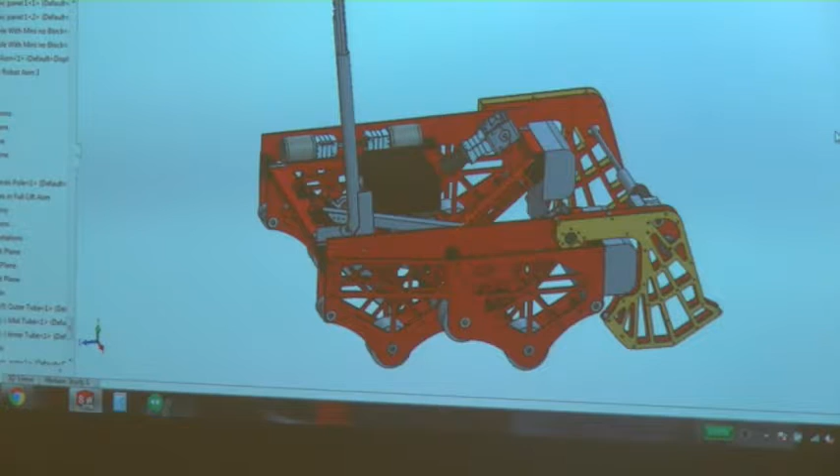So you guys are going to build winning robots this year. CAD drawings, that's the key. And he can do it. This is really - he's been doing this for a long time. This is actually pretty sophisticated.

But if you just get the measurements, okay, just CAD it up. You don't have to do all of these cutouts, and we did because we use a CAM master. You guys are allowed to come down and if you have your drawings and want to cut up some aluminum, let us know, we'll cut it for you, okay?

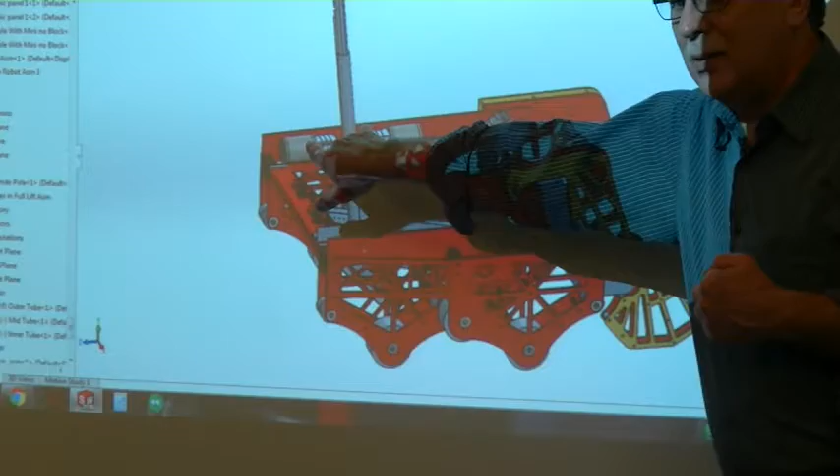The reason why I think we were able to win this year is 2 things. We had everything CAD'd up, and we were able to make a super light base because we had everything in drawings and figured out where we can cut out the extra aluminum to make a super light base to allow us to put all the stuff up here for the superstructure. Two motors over here weigh a lot, for the winch mechanism. The bars, the arms, this all weighs a lot. If we would have had a real solid aluminum base like we used to build in the past, there's no way we could have done it.

So if you come up with a design, come up with your base, and then even though you think you got a great weight margin and you're not worried about it - worry about it, okay? Try to make as light a base as possible. Because that will allow you to put extra stuff on your robot to make it more competitive. And make it as light as possible.

And again, give us a call. We're going to try to see - we got this CAM master to lay this stuff down. You give us the drawings and we'll cut it out, okay? Make it easy for you. And that, for us, this year was the first year we used the CAM master. We were able to do all this.

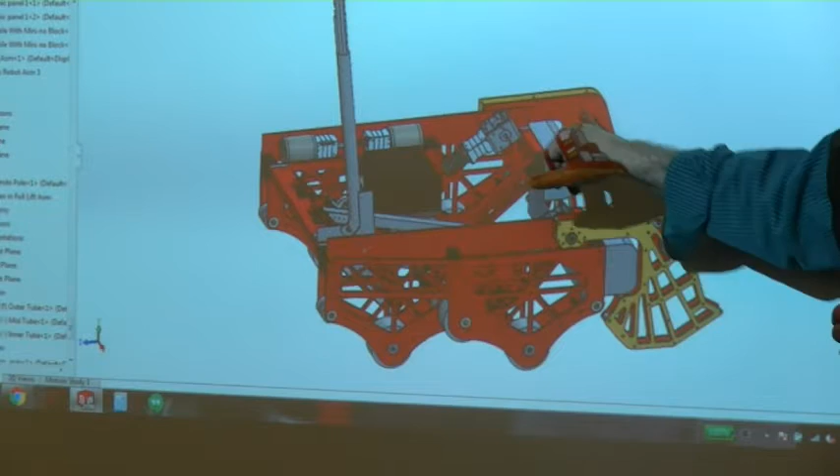Remember I said the dragon thing? Here are the dragon wings, see that in that one? Right? That's an afterthought. We had no clue what this robot's going to look like.

And then, don't design your parts first. Don't try to say 'oh, I want to make it as light and smallest as possible.' Work through what you need - the main point that you need to do, you need to accomplish your task. We need to pick up the ball. So we said, okay, this is what we need to do is pick up the ball.

But then you start going through and you start taking away weight. You start with these - we originally started off with one plate, a 1/4 inch plate. We said, oh, that would be strong enough. And first competition, the plate comes back bent after a match like that. So okay, well now we work through, and you just slowly start changing things.

And that's a good point. I mean, how do you take a 1/4 inch aluminum plate - it's hard to bend. But at this competition, because it got bent, it jammed up our intake. It was a mess. So how do you make something stronger and still lightweight? Well, you put 2 plates in with standoffs, and that's 3/16 plate, so it's actually thinner than what we originally started off with. And it's 10 times as strong, because now you have to bend 2 plates, plus where all the points are.

We figured out where all the force goes when you try to bend something. You can't bend this now because all these points here are against another piece of aluminum that's keeping it from bending. So if you look at the picture of the actual arm with the 2 pieces, it's lighter weight than the original, and it's 10 times as strong.

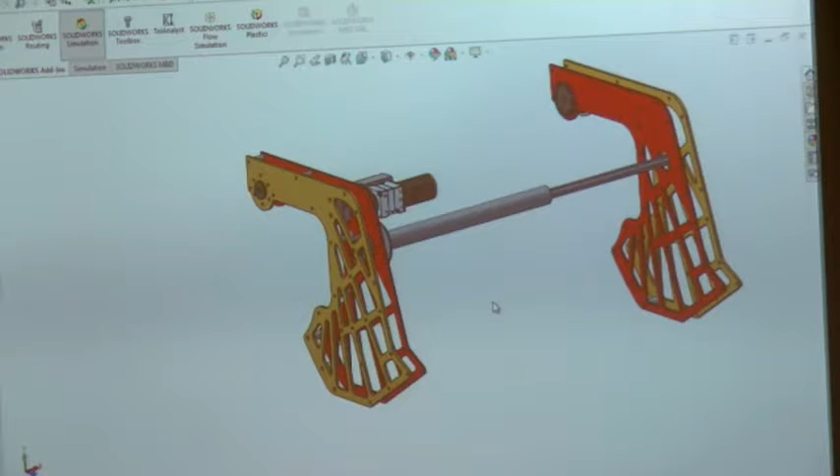One other big point. If you do get to the point where you can do this and you can start modeling everything in SolidWorks, ounces count. Don't put a bolt in that you get off McMaster-Carr and don't just bring it in, make sure you go back in. All of these items have mass properties.

So right now this is set at 6061 aluminum, so I can come back in here and if I click the right button, I can tell you that this weighs 1.18 pounds.

There's plenty of times where that's come back and bit us because he might have missed this, or he didn't account for the 10 pounds of screws that he gave us, or he forgot in the past the different weights of objects, and something you kind of missed on it.

You'll learn to go through and say, we've got 2 scales at Tri-C that we constantly keep around, and anytime we throw a part on, get a weight. Let's double check it, let's make sure that it actually weighs what it weighs.

Motors, transmission assemblies, make sure you guys kind of get a look at the weight. Do you realize just the pneumatics alone, if you put pneumatics on your robot, you're adding 12 pounds? For all your brass parts, your compressor is 3 to 4 pounds. Your storage tanks, depending on if you use the aluminum ones, I think those things are 1.5 pounds.

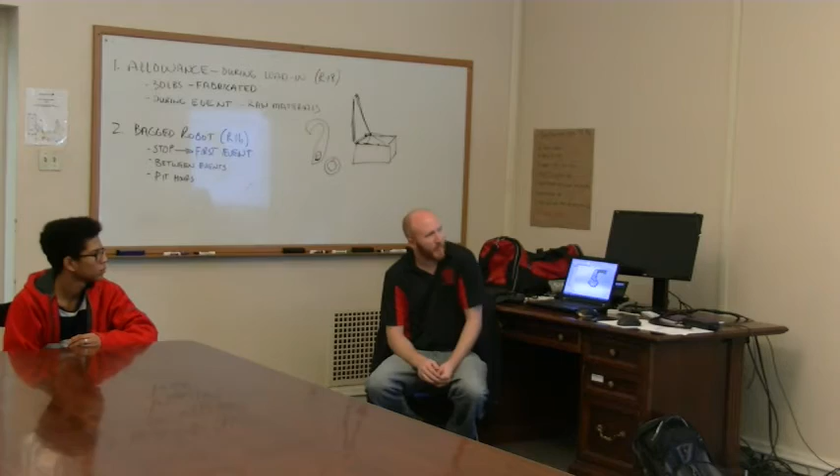You can just download it. It's a very expensive program if you were to buy it, and it's the education version. If you're in the First Robotics program, it's free. So get it, don't get frustrated, take your time.

You'll find out over time how to do parts a certain way. If you're not sure about one part that you're making, just save it, close it, open it up, save it as a new file, and start playing with it there. That way you never mess yourself up and you can go back to what you used to have. So that's, we really are done now. Yeah, yep.